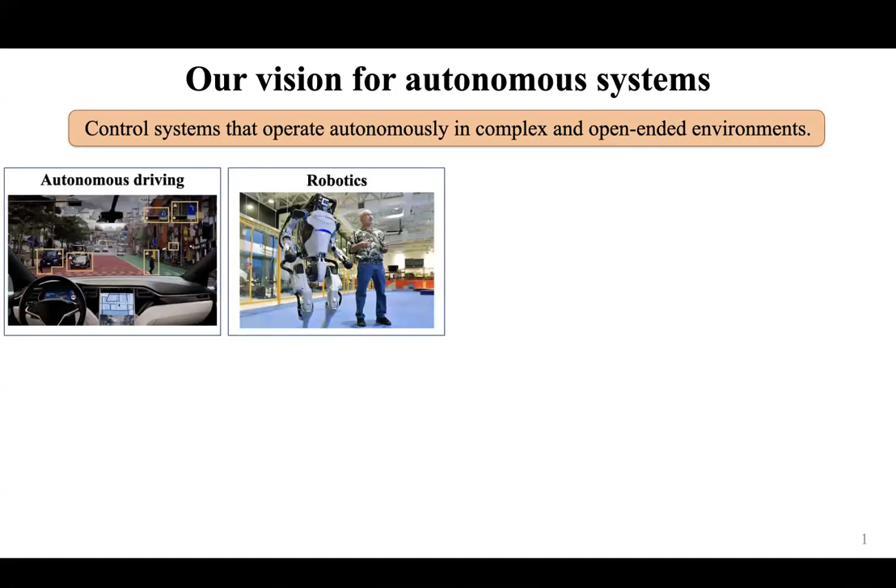They perceive the environment, they reason and learn from data using AI techniques, they assess risk and uncertainty, and they make decisions in order to achieve a wide variety of tasks. The specific applications in autonomy that I'm particularly interested in are autonomous driving and robotics, and more recently also wildfire prevention. As you can imagine, in Southern California, this is a big topic, as well as warehouses.

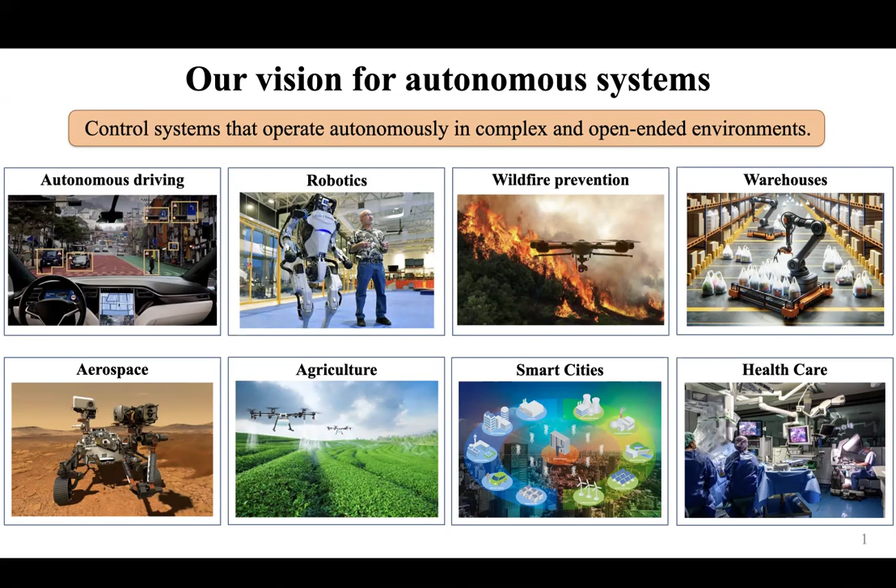But there are many more, for instance, in aerospace, agriculture, smart cities, or in healthcare. And all of these applications certainly highlight the importance and the potential impact that autonomous systems research may have in the future. Over the past years, the wide availability of data coupled with computational advances in machine learning and AI has accelerated the progress that we have made in order to build these systems.

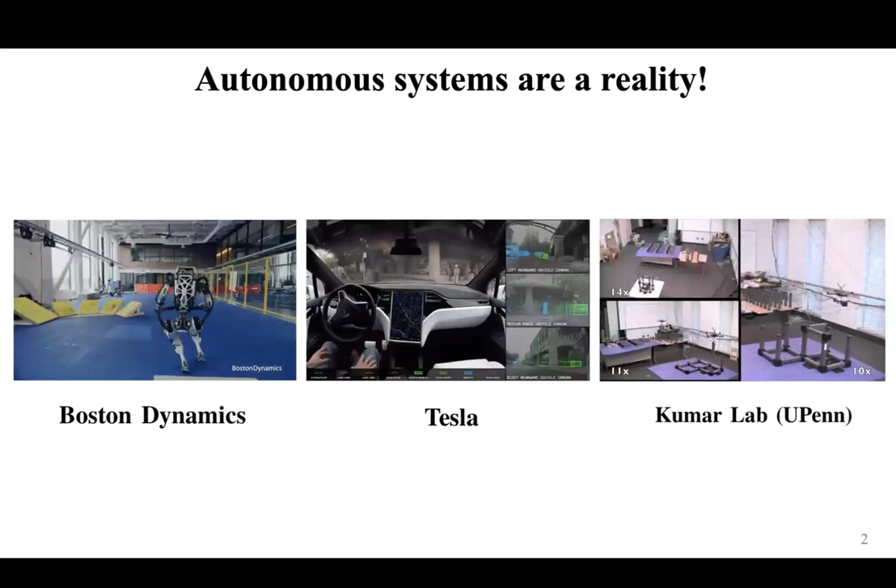And I've shown three examples here, Boston Dynamics robots, Tesla cars, or a drone fleet at the Kumar Lab, where these systems really perform highly challenging tasks with ease. And indeed, from these videos, one could claim that autonomous systems are a reality. However, the question that I would now like to ask is, do we really have all the theories and tools in hand to build autonomous systems that are also safe?

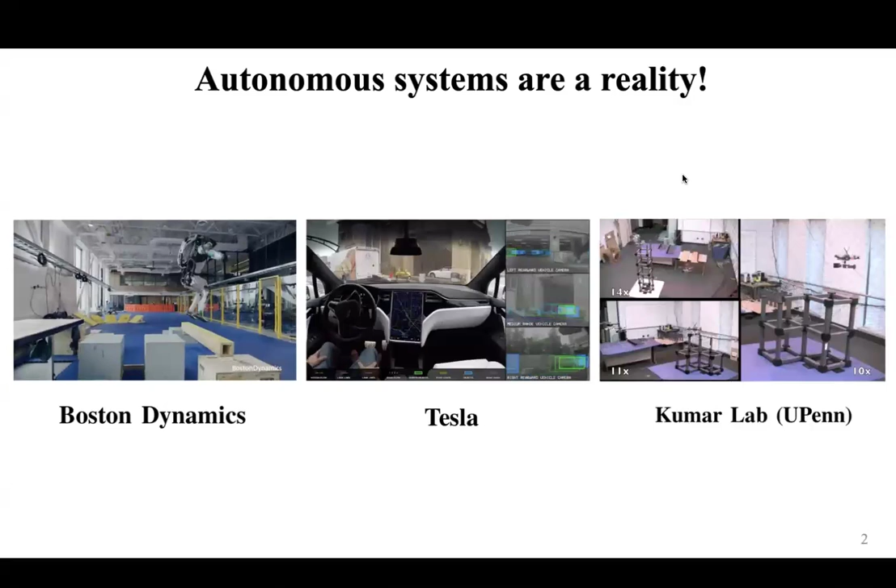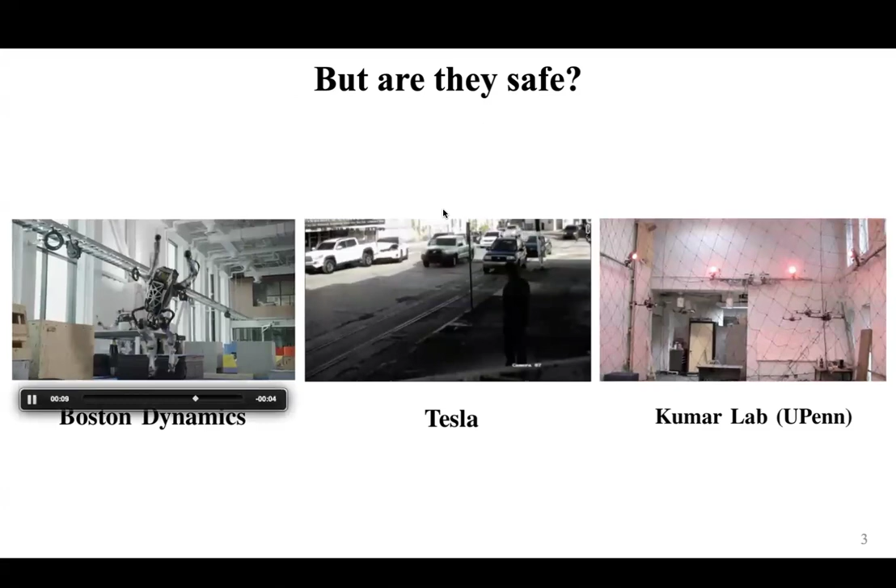And I would argue that the answer to this question is no. Simply because at the same time, we've seen a lot of failed demonstrations. We've seen Boston Dynamics robots crashing, Tesla cars colliding, and we've seen drone fleets collapsing. Even more so these days, autonomous systems are learning-enabled, and learning-enabled systems turn out to be fragile.

For instance, if we think back a couple of years to 2015, we thought that by 2020 we would have self-driving cars. Evidently, this is not the case. Even worse, industry has reset their expectation from level 5 autonomy, so full autonomy, to only level 4 autonomy, meaning autonomous driving only in certain environments.

One is certainly that the way that we train our AI is fundamentally flawed, as we train and tweak our algorithms to lab-like environments and specific scenarios without generalizing to other scenarios and to the real world. Another reason is that neural networks, or AI in general, is fragile and easy to fool.

There's a famous example from a couple of years back where we have an image of a panda and a classifier that correctly classifies this image. Once we put some small noise on top of the picture, the resulting picture, to the human eye at least, really looks the same, but the algorithm suddenly misclassifies it as a gibbon. So algorithms make wrong decisions and they're not aware of the uncertainty that the algorithm has in a specific instance.

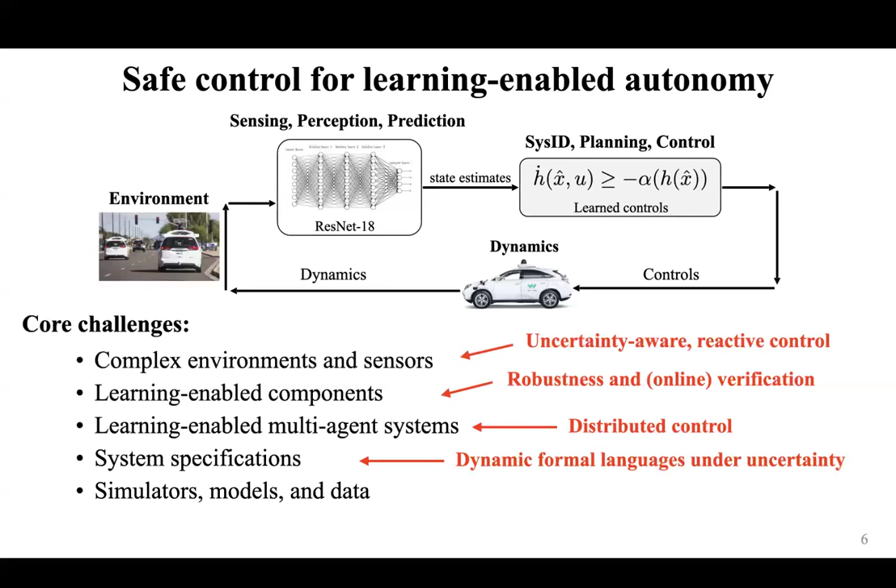And we have these days photorealistic simulators, we have high fidelity models, and we have sometimes more, sometimes less data. But how can we use these to mitigate the sim-to-real gap? And lastly, real-time computation. We want to do all of this fast, and therefore we need efficient computational algorithms.

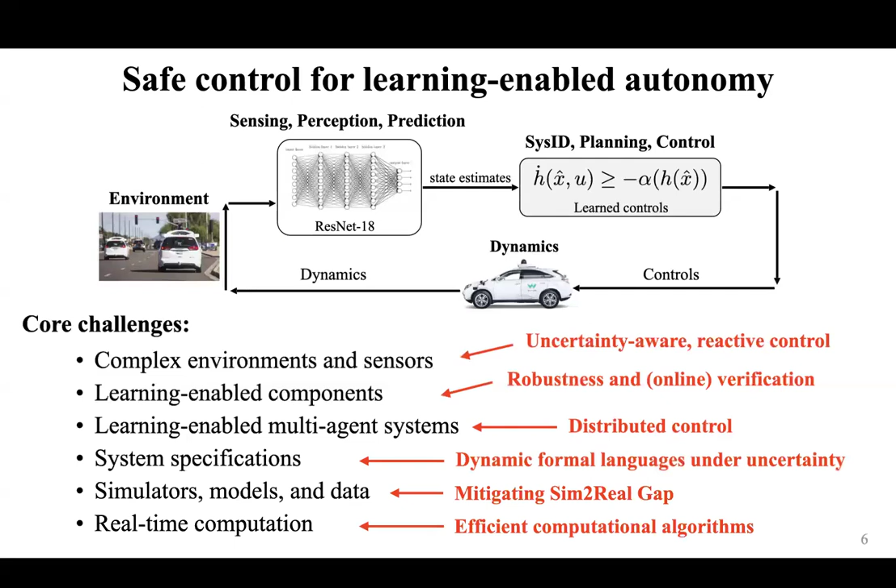Now, my research focuses on the design of verifiable control frameworks for autonomy, along with efficient computational algorithms. And my group, more broadly, focuses on these 5 areas, one being data-driven control. So I've thought about how we can learn control laws from expert demonstrations.

And one other thrust in my group is on statistical system verification. Here, for instance, runtime or online verification. How can we, during the operation of the system, predict that the system might potentially enter failure modes?

I've also worked on multi-agent systems, such as temporal logic constrained multi-agent systems, and more broadly on formal methods and control. So how can we design control algorithms for systems under formal specifications? And how can we maximize different notions of robustness, for instance here, temporal robustness?

And lastly, risk-aware autonomy, how can we make decisions under uncertainty? And this is what I'm mainly going to talk about today in more detail. And at the very end, I'll give you highlights of the other parts of my research as well.

So in summary, my research provides a formal and computational approach to systems and control theory. In my research, I use theories and tools from control theory, formal methods, and machine learning and AI, as well as applied statistics. And as you can imagine, I work at the intersection of these fields. But really the glue that puts these fields together in my research is optimization and different notions of robustness.

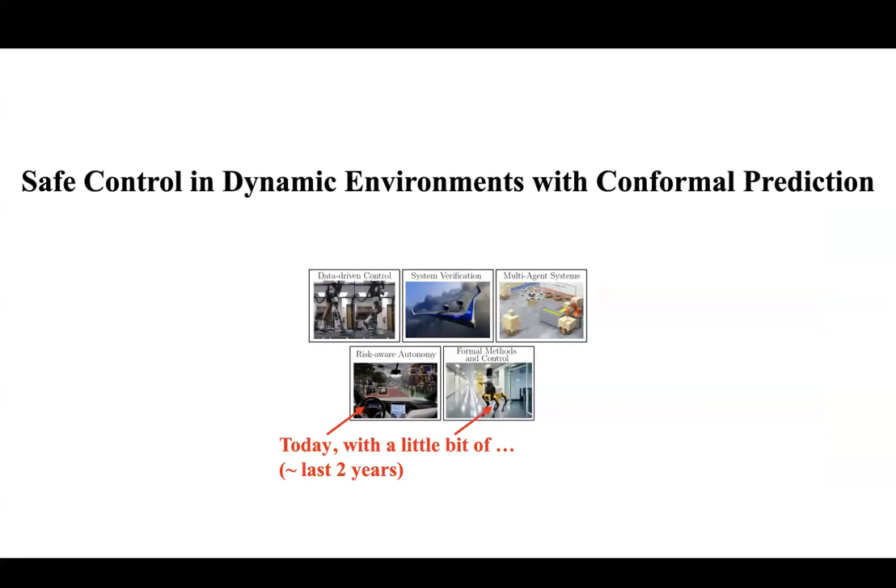The specific topic I'd like to talk about today is safe control in dynamic environments with conformal prediction. And a little bit of formal methods you will see in the end. And as I mentioned before, this is basically the research that I've been doing in my group over the last 2 years. Okay, so what's the problem that we want to solve today?

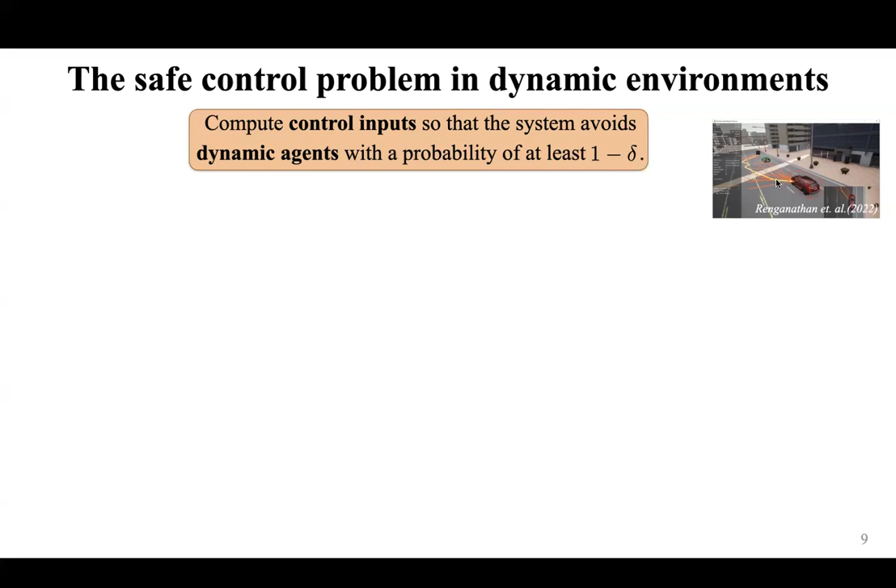We would like to compute control inputs for a system so that the system avoids dynamic agents in the environment with a probability of at least 1 minus delta. So imagine that you have a car over here and you would like to compute control inputs for the car so that it avoids other cars and pedestrians in the environment. Why is this a challenging problem?

Well, first of all, the dynamic agents, they may be stochastic and have unknown intentions. What one usually does is one may use complex learning-enabled predictors. However, as we saw before, these may be fragile. So how can we get uncertainty quantification for the dynamic agents as well as for the learning-enabled predictors and integrate them into control? It's a challenge.

Some existing work that I don't want to omit here: you could use vanilla motion-based planners, for instance, graph or sampling-based. However, these typically ignore dynamic agents. You could also use reactive control methods, navigation functions, dynamic window approaches, or control barrier functions. However, as these are reactive, they don't use any predictions and typically consider simple systems.

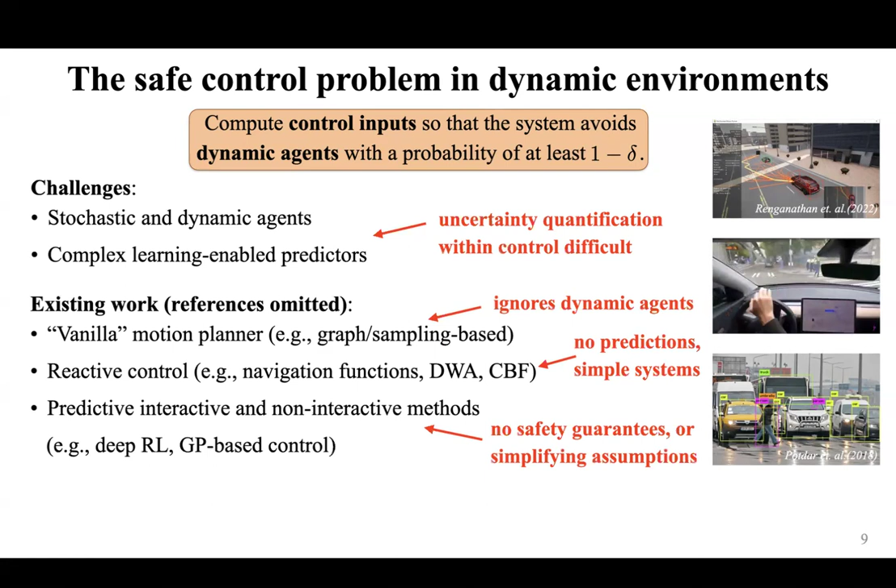And more recently, there have been works on predictive, interactive, and non-interactive methods, for instance, DeepRL or Gaussian process-based modeling and control. However, these rarely bring safety guarantees, or they have to make simplifying assumptions. So how can we quantify uncertainty of learning-enabled predictors and design safe control laws?

Now, I would first like to talk a bit more broadly about learning-enabled systems and how we can reason over their safety. And one big challenge here is how do we reason about their safety when they're high-dimensional? And by high-dimensional, I really mean that we have deep neural networks in here, so networks that have several layers and that may consist of hundreds or thousands of neurons, right? So analytically analyzing this closed loop is difficult.

There are existing works, for instance, satisfiability modulo theory solvers or mixed integer linear programming techniques, or even hybrid systems reachability. However, these techniques face scalability issues, and you certainly cannot use them during the runtime of the system, so during real time. On the other hand, there are relaxations, for instance, convex relaxations like semi-definite programs or linear programming relaxations, or even compositional approaches. However, these are usually overly conservative, and you also cannot use them.

So ideally, we would like to navigate this trade-off between scalability and conservatism. And additionally, we would like to reason over randomness that enters this loop. For instance, disturbances on the car, noise on the sensors, or the dynamic environment itself that brings inherent randomness. And we were asking ourselves, can we instead use efficient statistical tools to formally reason about safety of learning-enabled systems?

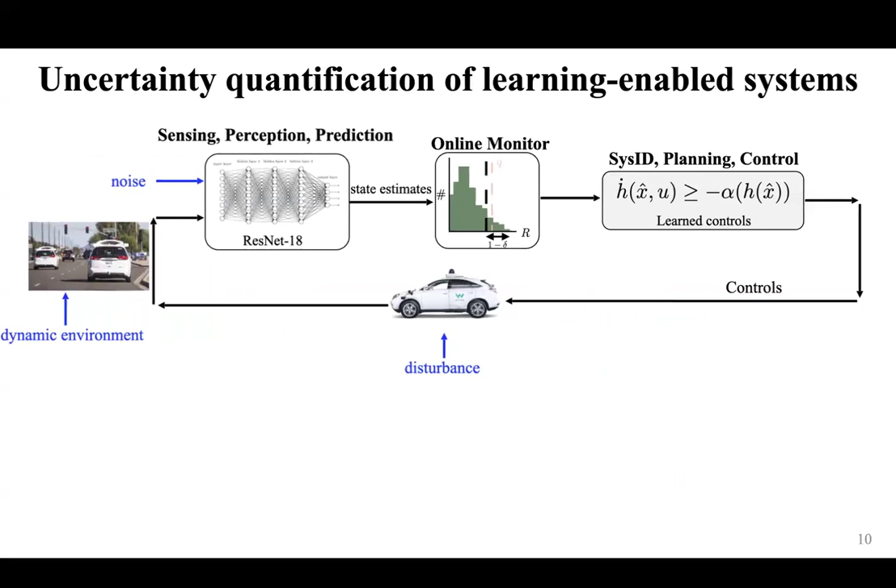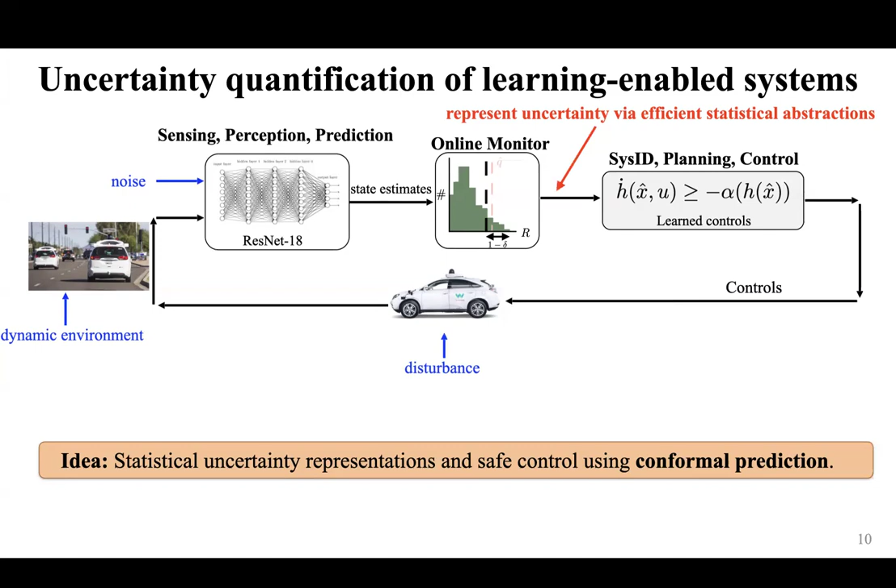Now, what we argue here in this line of work is that what we need is an online monitor that we integrate into this loop and that represents uncertainty via efficient statistical abstractions. So the idea is really statistical uncertainty representations and safe control, to do this using a statistical tool that's called conformal prediction. Now I need to tell you a bit more about conformal prediction, as you may have not heard about it, and I'll do this in a nutshell.

So conformal prediction has become very popular in recent years. In fact, there was a keynote talk on it in NeurIPS in 2020. And it has become popular because it can do uncertainty quantification under minimal assumptions. So what I mean by that is it's distribution free. Assume you're given input-output pairs in a supervised learning setup that are drawn from a distribution calligraphic D, then we don't need to make any assumption on this distribution. It could be any funky distribution. It doesn't have to be Gaussian.

At the same time, we don't need to make any assumption on the predictor. For instance, if you have a predictor mu that takes an input and estimates an output, it could be a neural network again. However, what we need is the availability of an IID calibration data set. So a set of input-output pairs that are also drawn from this distribution calligraphic D.

Now, the goal in conformal prediction is the following. Assume that we fix a failure probability delta. Then you would like to compute a prediction region C, such that with probability of at least 1 minus delta, a new test data point Z is contained within this prediction region C.

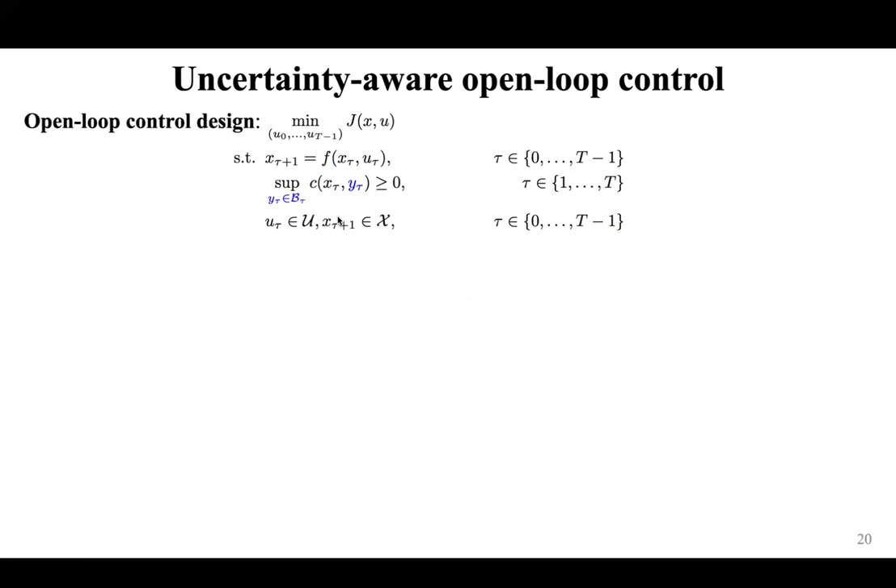Okay, so now one can use these prediction regions and can simply design a controller. And the first thing to do would be an open loop control design. So we want to find an open loop control sequence U0 to U of capital T minus 1 that minimizes a cost function subject to dynamic constraints, input constraints, and state constraints, and importantly, a robust safety constraint. So we enforce that the safety constraint C holds for all states Y within our prediction regions.

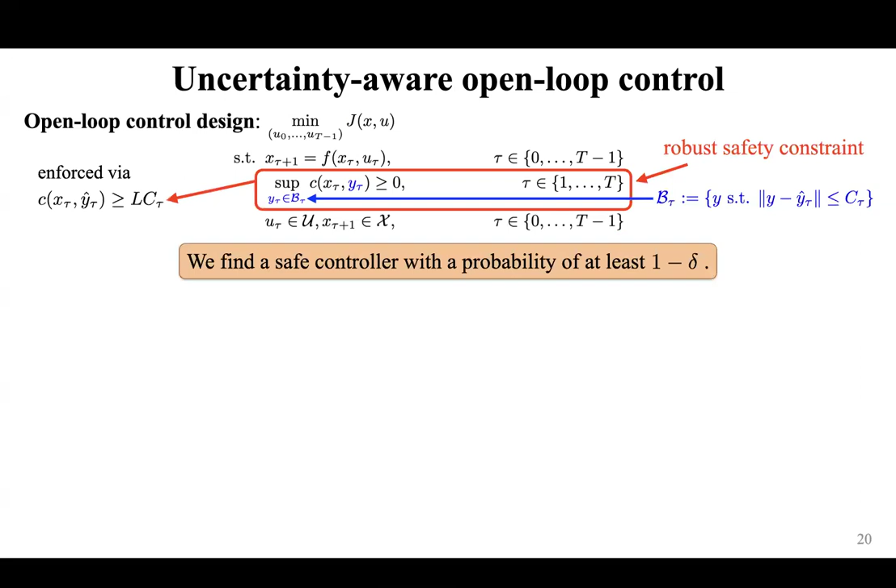Now, how can we enforce this in practice, as this is another bi-level optimization problem? We use a Lipschitz constant reformulation. So we enforce that C evaluated at the prediction Y hat is lower bounded by the Lipschitz constant of C times the quantile capital C tau. And if we can solve this optimization problem, we find a safe controller with a probability of at least 1 minus delta. So let's look at a small toy example.

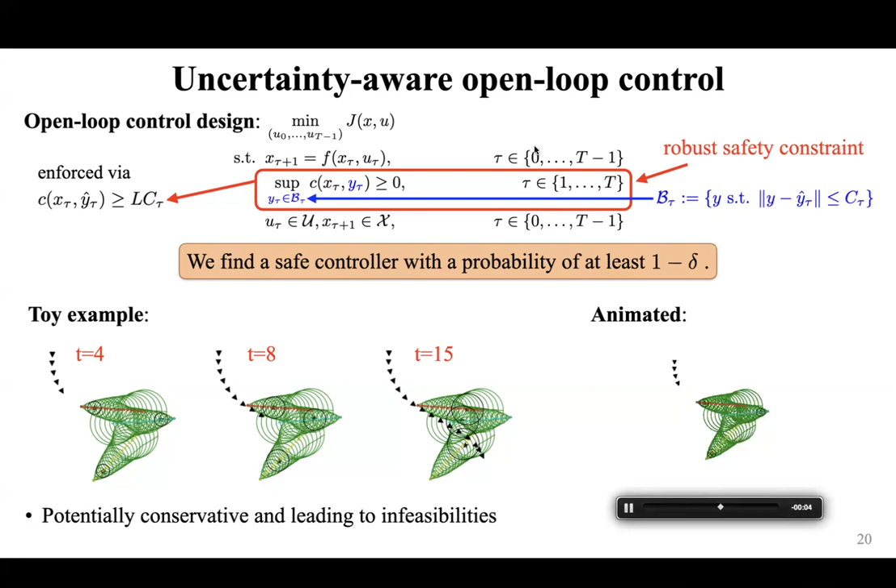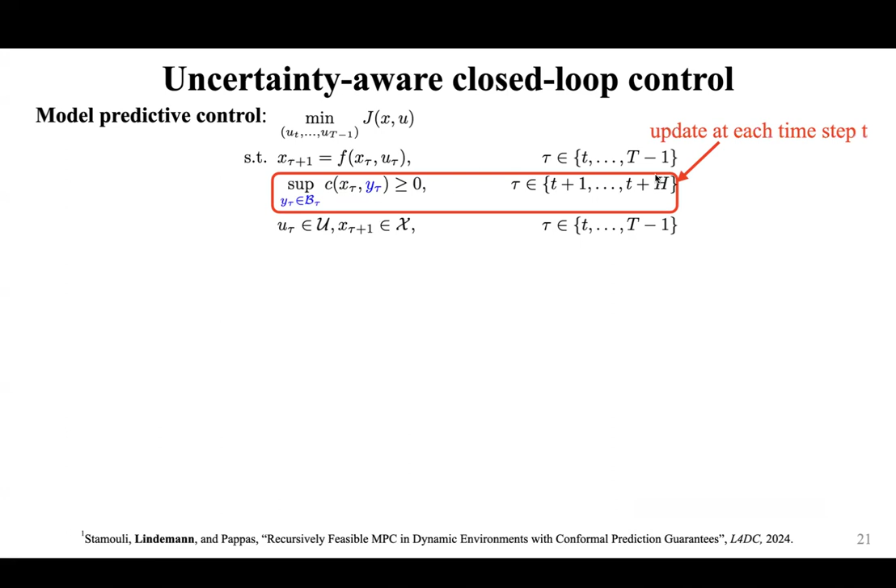So what we instead do is we use this optimization problem in a receding horizon fashion using model predictive control. So now instead at each time, we recompute the control input by obtaining measurements of the pedestrians, by recomputing the prediction regions, solving this optimization problem, and applying the first control input. Okay. So what we're doing is we're solving this optimization problem at each step where we update this robust safety constraint, and where additionally we use a prediction horizon here.

Now, if this MPC here is recursively feasible, we can show that we find a safe controller with a probability of at least 1 minus delta. Importantly, in a paper that got recently accepted that will be presented at L4DC, we show how we can modify this robust safety constraint, and under certain conditions we can show how we obtain recursive feasibility. Now, getting back to our toy example here, now you can see that at each time step, the agent recomputes the prediction region so that the path that the robot is taking is much less conservative.

We also implemented this in Carla, and the first thing we wanted to do is compare the theoretical guarantees with the empirical observations we made. So we were here guaranteed to have a 99.83% coverage for the one-step ahead predictions, and empirically we found that we're slightly higher, in fact. When we ran the MPC 100 times, we only observed 1 safety violation, while we were guaranteed to have at most 5. And we also did a comparison with the Gaussian process. In fact, we found out that the Gaussian process that we trained here only had coverage of around 70%.

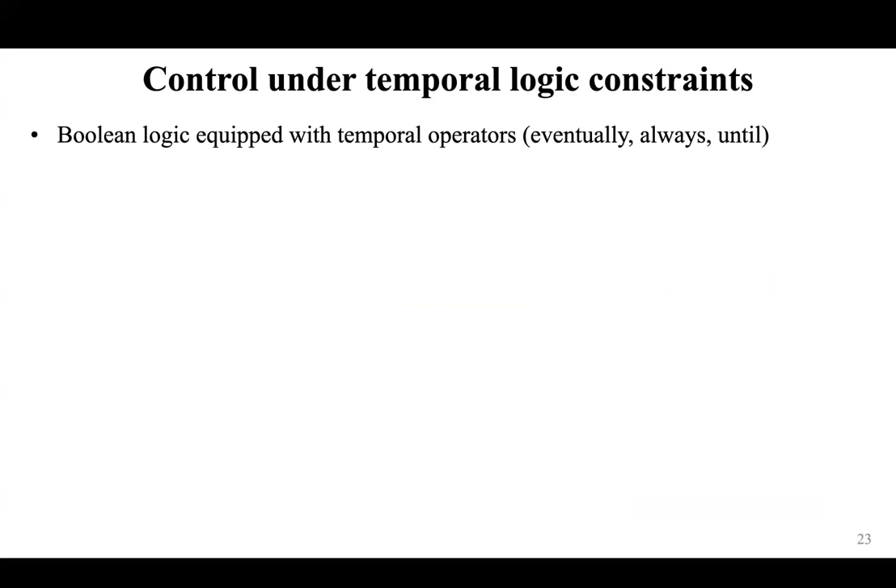Okay, so far we talked mainly about navigation specifications. So we wanted our robot to go from A to B while avoiding obstacles. But one may be interested in more complex mission specifications that we're here enforcing using temporal logic specifications. So for those of you that are not familiar, temporal logic is Boolean logic equipped with temporal operators such as eventually, always, and until.

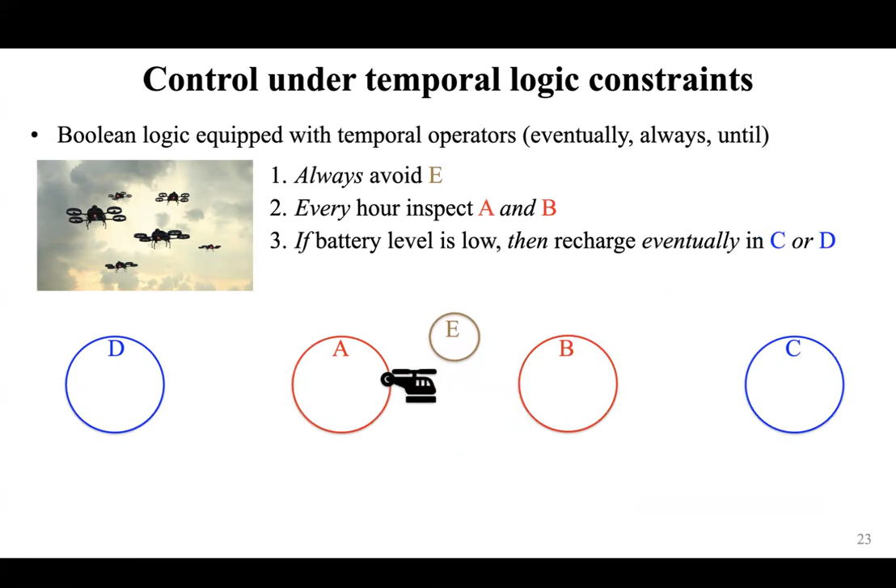And while I don't want to go into the syntax and semantics of temporal logics, I want to give you an example so that you can see how expressive temporal logic is and what kind of specifications you can impose on a system. For instance, for this drone here, you could say always avoid region E, every hour inspect regions A and B, and you can have reactive specifications, such as if the battery level is low, then recharge eventually in C or D, and always between some time, turn on communication.

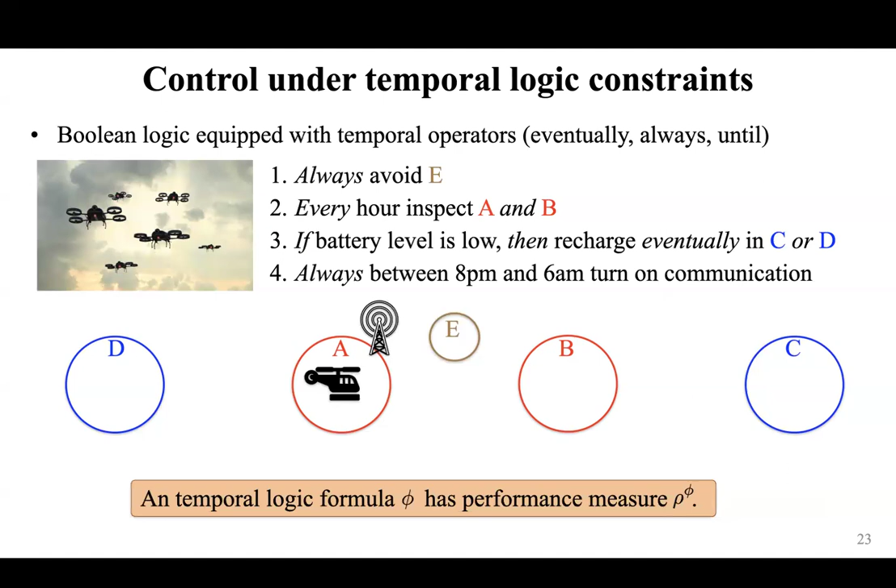Okay. Like I said, I don't want to go into details here, but we will denote temporal logic formulas by the symbol phi, and you can associate a performance measure rho phi with such a formula. And if this performance measure is positive, it means that the formula is satisfied, and more generally, the more positive the measure is, the better it is for us. So now what we consider is such a temporal logic task that has a performance measure rho phi that is defined over the system X and the environment Y.

Okay. So to do control, we proceed as before. We predict the behavior of the pedestrians into the future. We compute our prediction regions here, but then it gets a little more tricky because our task specification is now more complex and a temporal logic specification. So what we do here is we compute a robust performance measure, rho phi bar, that is defined over X and the prediction Y hat.

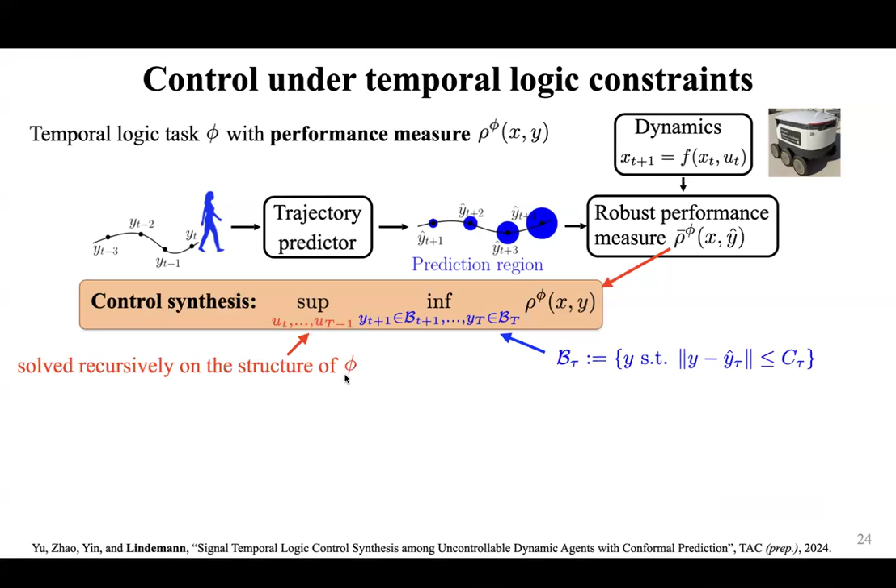So what does this look like? On a high level, we simply compute the worst case performance measure. So we take the infimum over all the states in our prediction regions and we evaluate the performance measure over it. Now, the control problem is, of course, that we would like to maximize this robust performance measure by picking the right control inputs. And we show in a paper here that is on arXiv already and that we're about to submit soon, that we can solve this problem recursively on the structure of this temporal logic formula, and it effectively results in a mixed integer linear program.

Okay, so lastly, I would like to talk about distribution shifts. So what do I mean by distribution shifts? Well, it's simply when the design and the deployment conditions of the system, or of the environment specifically, may be different. Then we refer to this here as a distribution shift. What are examples of this?

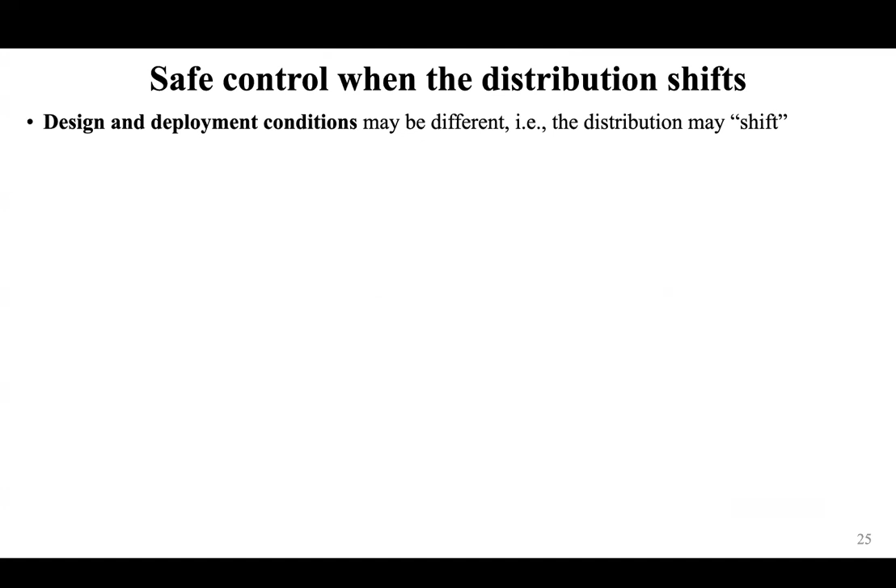For instance, we could have collected data at an intersection close to a nursing home where we have mainly old people. And now we want to employ the algorithm close to a high school or to an elementary school where we have young kids running around and their walking pattern is certainly different. Okay. Another example is that we could have used data from photorealistic simulators, but now we want to employ our system in the real world.

Okay, so in these scenarios, the framework that I presented before really has no safety guarantees. However, luckily, there are versions of robust conformal prediction that let us still deal with this problem. Here, in this case, assume that our calibration data is drawn from some design distribution, calligraphic R, and that our test data point is drawn from some deployment distribution, calligraphic R0. What we assume here is that these distributions are bounded in some suitable sense. Here we're saying that the F divergence between these two distributions is bounded by epsilon.

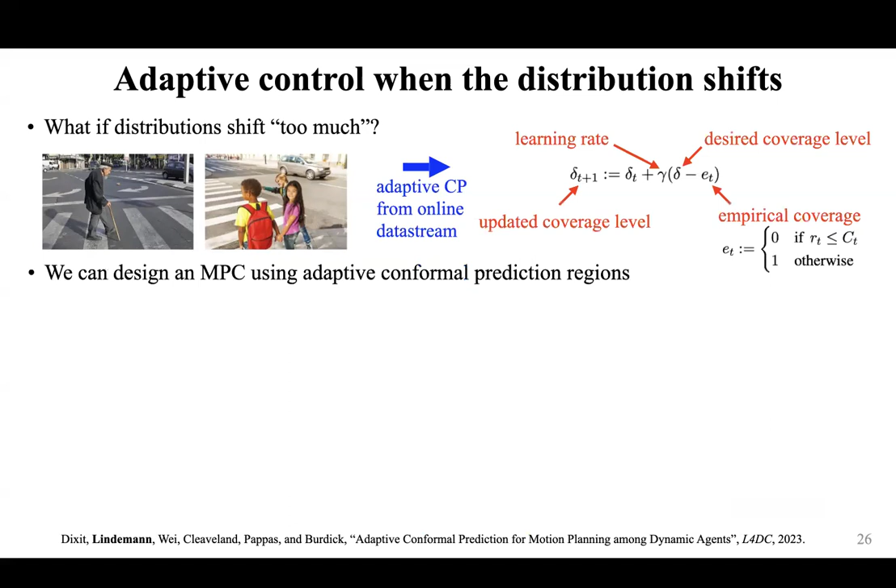And again, under this assumption that the MPC is recursively feasible, we find an on-average safe controller. Specifically, we know that when the mission time horizon goes to infinity, we recover our 1 minus delta coverage, but now only when we average over the safety constraints over time. We implemented this on a drone that should avoid a flying frisbee. The frisbee has highly nonlinear dynamics and is subject to noise.

And all I want to talk about here is a comparison with existing work. We aimed for 97.5% coverage here. And in fact, we achieved 99.2. And the minimum distance to the frisbee was only 2.91 meters. While some competing methods here from one of my collaborators and an extended Kalman filter achieve 100% success rate. So it's more safe, but it's overestimating the uncertainty. Recall, we're only aiming for 97.5%. And in these cases, the minimum distance to the frisbee was 14.2 and 5.27 meters, which means we overly estimate the uncertainty. And with our algorithm, the drone can fly closer to its performance limits.

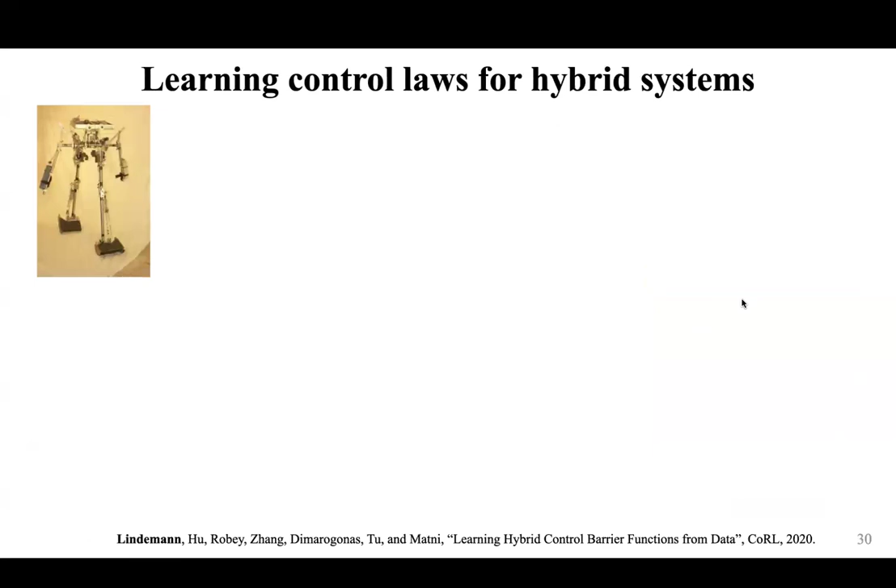We also learn controllers for hybrid systems. For instance, here we have a walker that walks down an inclined ramp. If you don't apply any control action to the walker, it will just fall down after a couple of steps. However, you can, in fact, actuate the walker in the hip and in the ankle.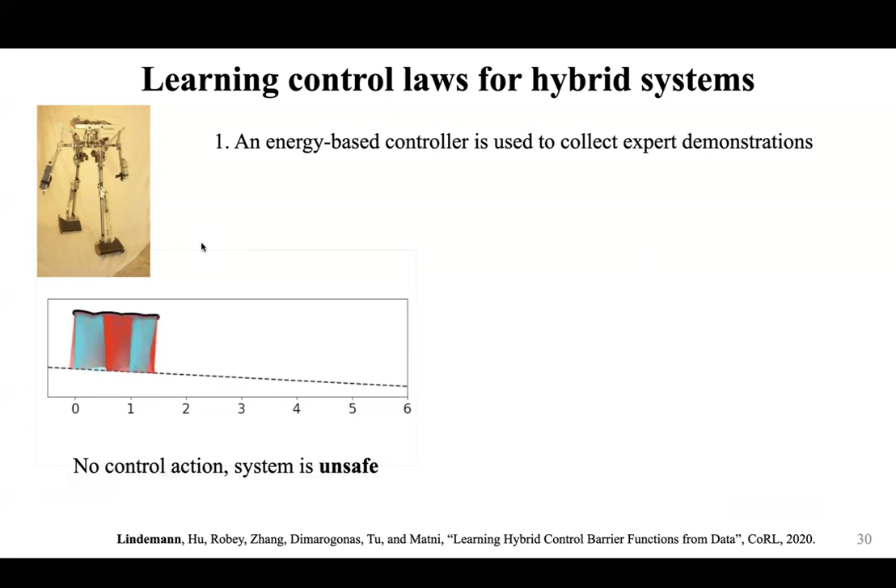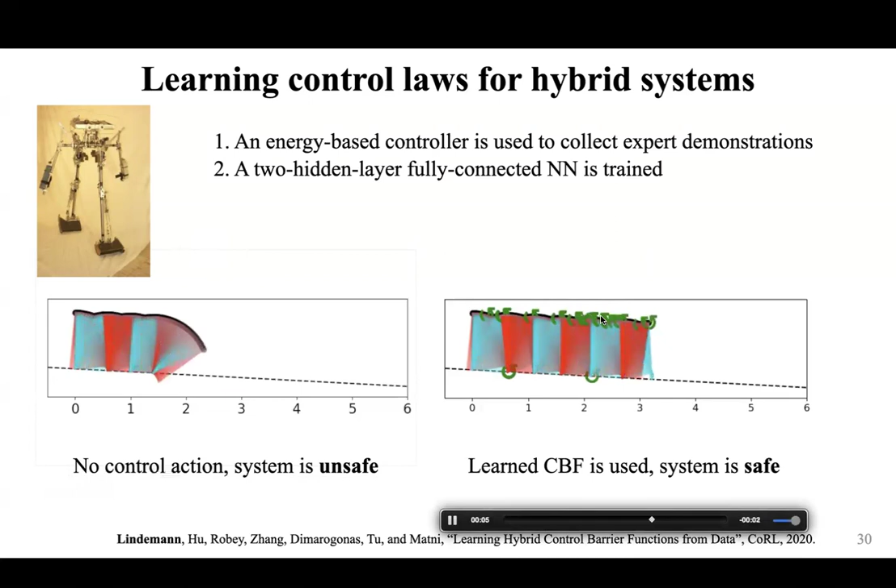And what we did is we used an energy-based expert controller from Russ Tedrake's textbook to collect expert demonstrations. And we then trained a two hidden layer fully connected neural network. And the result is what you can see here. So the corrective control actions from this learned controller are shown in green, and we see that the system is safe.

Another highlight from my research agenda that I want to talk about is on system verification. So specifically, I've worked on predictive runtime verification, where we assume that we have observed a partial trajectory of the system during its operation, during its runtime. And we would then like to compute the probability that a performance measure here, again, of a temporal logic specification is non-negative.

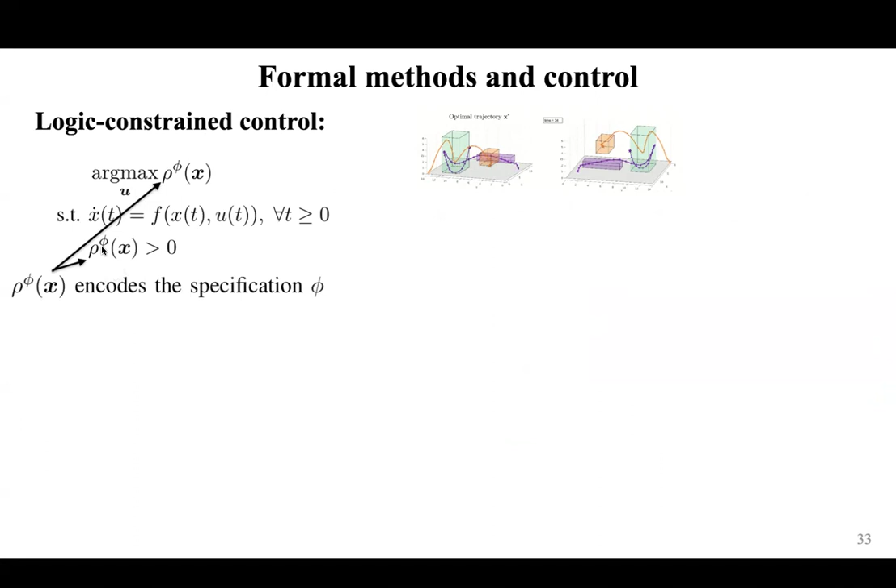And lastly, I want to briefly at least talk about some highlights from my research agenda on both multi-agent systems and formal methods and control. So the broad problem that I worked on here is a controls problem. So we want to solve a control problem under temporal logic specification. So we would like to enforce that this performance measure rho phi is positive and that we potentially maximize it, okay? Subject to some dynamics constraints.

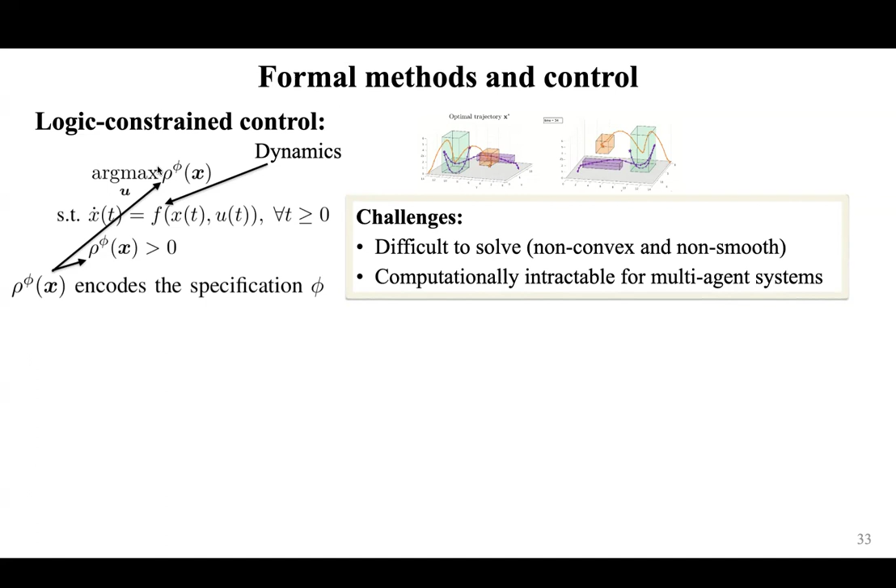Now, why is this a challenging problem? Well, it's difficult to solve in general because this performance measure is non-convex and non-smooth. And specifically, it's computationally intractable for multi-agent systems. So one line of work that I have designs integrated planning and feedback control methods. So the planner kind of decomposes the complex temporal logic specification into a sequence of simpler specifications that are then executed by low-level and time-varying feedback controllers by each agent.

And my PhD advisor and I, we have written a book on this topic that's called Formal Methods for Multi-Agent Feedback Control Systems that's scheduled to appear in MIT Press in the Cyber-Physical Systems series in spring 2025.

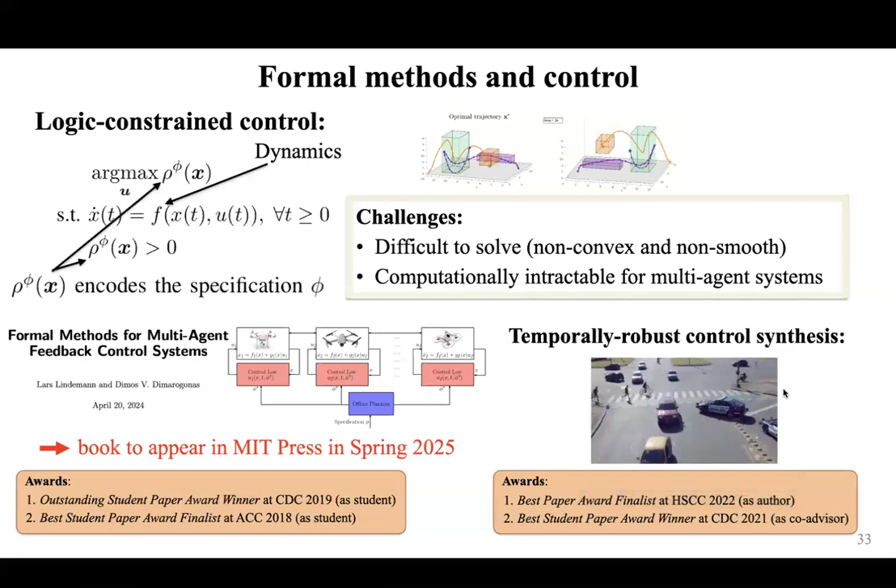I've also worked on temporally robust control synthesis. I don't want to talk about this too much, but we controls engineers, we often talk about robustness in terms of tubes, for instance, tube-based MPC, right? But temporal robustness, as you can see here, may also be relevant in some applications, and we design temporally robust controllers.

And with that, I'd like to thank you. I hope this was a good overview of the activities that are going on in my group, specifically also we talked about one of the topics in more detail.